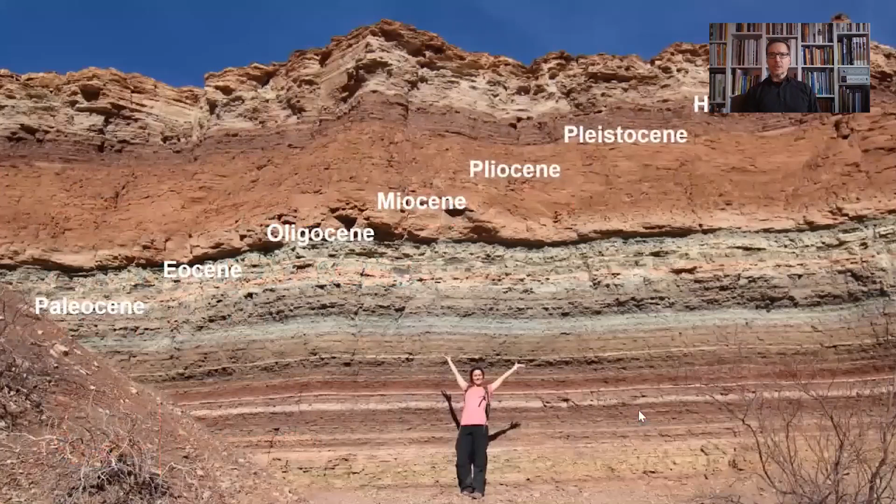But first, what is the Anthropocene? It's a geological era during which human actions have permanently been recorded into the layers of our planet's crust. We see traces of plastics, heavy metals, other sorts of pollution, greenhouse gas levels increasing, and our destructive action is now permanently recorded there. This was brought up by the Secretary General of the United Nations, Antonio Guterres, last December in his first speech about the state of the planet.

And he had rather grim messages, I'm afraid. He said that humanity is waging a war on nature. This is suicidal. He also said that biodiversity is collapsing and ecosystems are disappearing before our eyes. He went on saying that apocalyptic fires and floods, cyclones and hurricanes are increasingly the new normal. He ended by saying, let's be clear, human activities are at the root of our descent towards chaos. That was quite a heavy message from him.

So he concluded that making peace with nature is the defining task of the 21st century. My question this morning is, how can we make peace with nature, and more specifically, what's in it for architecture? So now to the 3 facts and 3 viewpoints.

First of all, I argue that we should reconsider the needs for construction. This is relatively simple by just looking at the global statistics. If we look at the consumption of the 4 mostly produced raw materials—steel, plastics, aluminum, and cement—we can see that their current production ways would lead to close to 920 gigatons of CO2 emissions by 2050. Now this is almost twice the amount of emissions that we could afford to cause if we wanted to keep the planet from warming beyond 1.5 degrees.

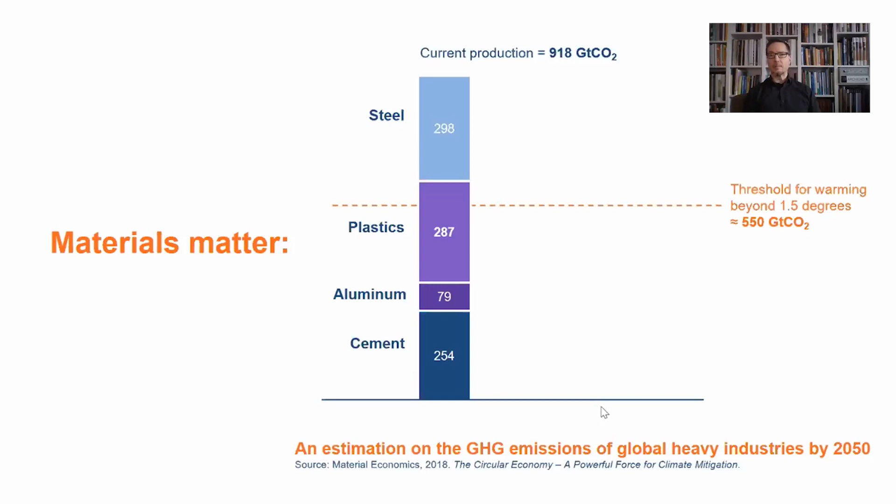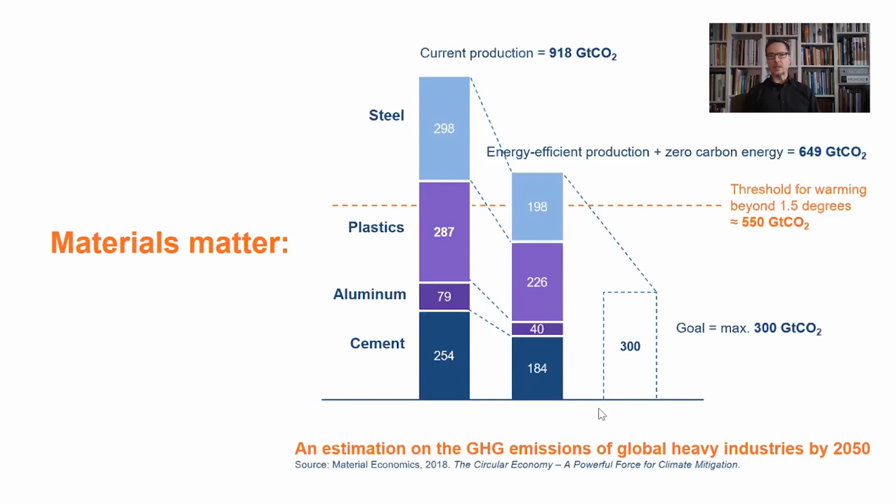So if we change the way we make these materials by introducing energy-efficient factories and zero-carbon energy, we could lower these emissions, but that's still not enough. It appears that only with radical interventions of circular economy could we push these emissions down to around 300 gigatons, which would be the absolute maximum. Now why is this relevant for us this morning? The reason is that these materials are mostly used in construction—not entirely, but the construction sector is the main consumer of all these 4 materials. So therefore this is important for us.

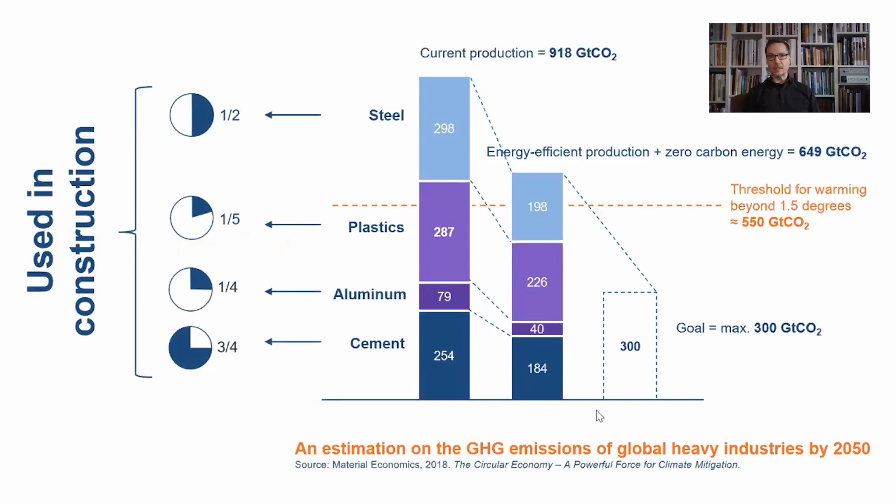So that's why we could ask help from the ancient Chinese general Sun Tzu.

He was not a general expert in the topics we are talking about today. He was not a master of sustainability, he was a master of warfare. And he wrote in his famous book, The Art of Warfare, that the highest level in warfare is not to defeat your enemy in battle, but to defeat your enemy without battle. If we translate this to the language of architecture, could we solve the problems, or satisfy the user's needs, without building anything?

I'm suggesting that we should have a hierarchy for resource efficient construction, in which the first priority would be to do nothing but just utilize existing spaces. Thereafter, renovate them. Then as a third option, refurbish an old building. And as a last option, if none of these work, consider building a new one. This is a straightforward approach and doesn't fit all purposes, but it's something we could consider if we were to drastically reduce our material intensity, especially in the construction sector.

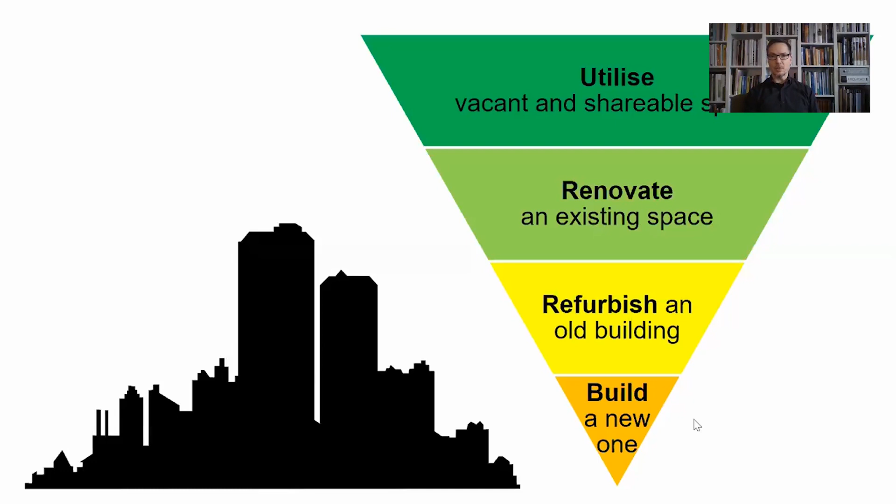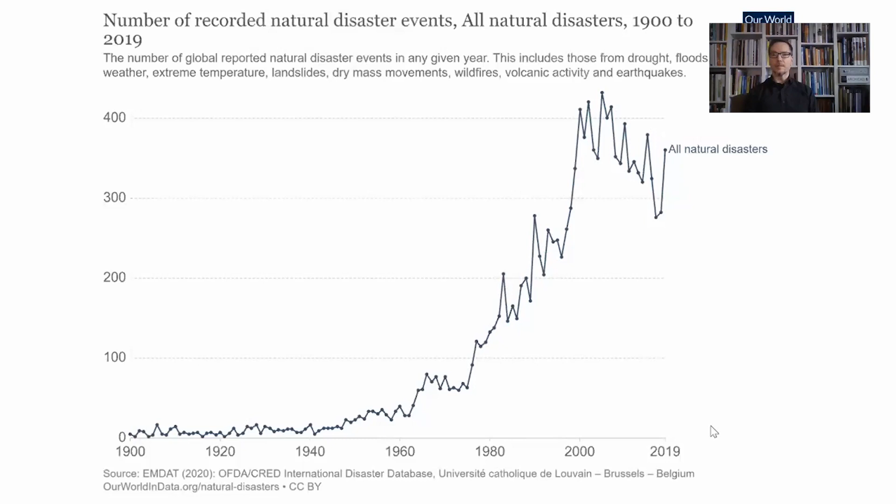My next point is that we should improve the resilience of the built environment. Looking at the facts, it's clear that the number of natural disaster events has gone drastically up, and we can see a clear linkage to anthropogenic climate change. There are more storms, the intensity of storms is increasing, there is increased flooding in certain regions, and this is of course very detrimental to construction.

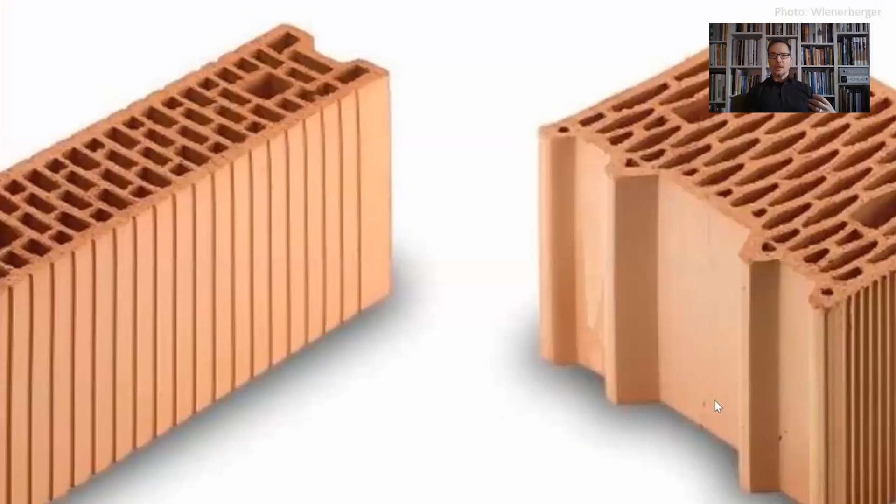So if we were to make our buildings more resilient towards these changes that seem to be going on, should we consider something simpler, something more robust when we talk about materials for construction? Should we consider solid materials? Should we consider massive materials, or even vernacular materials that would be so much easier to extract from nature without heavy processes?

If we fail to address the urgency of climate change, we may go beyond the tipping point of the melting of global glaciers, and that would cause significant sea level rises in the future. At that point, or even before, resilience would not just be against the forces of nature, but also against social and economic unrest, which might be a very significant factor for the maintenance and funding of the buildings we have today or wish to repair tomorrow.

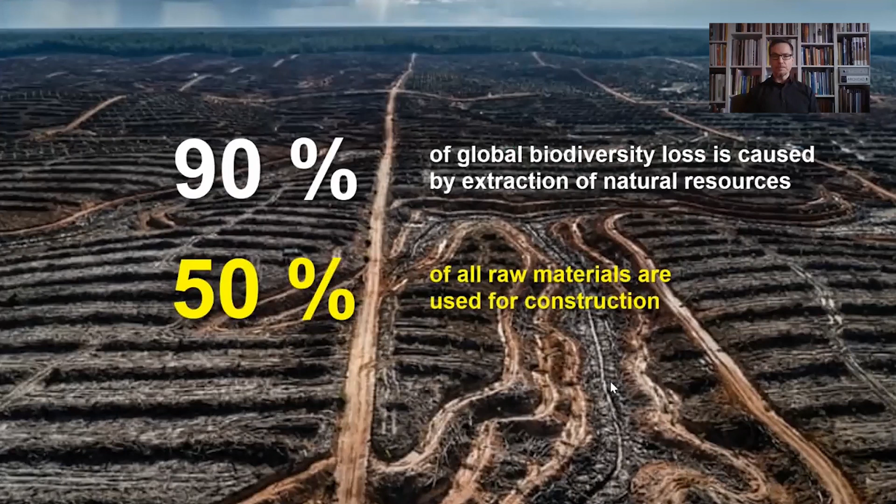My third and final point is that I think we should question our anthropocentric construction culture. At the moment, 90% of global biodiversity loss is caused by extraction of natural resources, and furthermore, 50% of all raw materials are used for construction. And the trends are unfortunately pointing in the wrong direction.

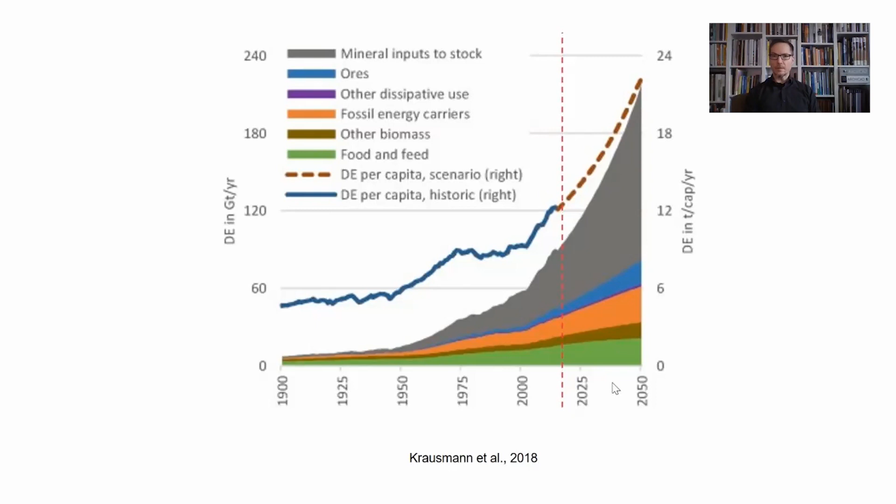But while we are consuming half of the global raw materials every year for construction, we are doing that at the cost of our neighbors on this planet. While we extract materials, we take that from the habitats of animals and plants and other species of life with whom we share the only habitable planet we know of. Should we reconsider this? Instead of just being an extractive and destructive force on this planet, could we consider ourselves as one of the many forms of life with whom we share this dear planet Earth?

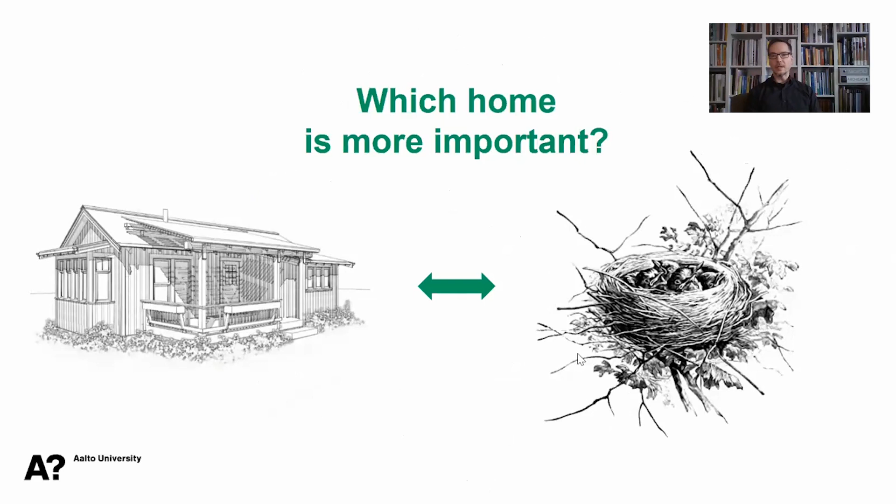If we could consider ourselves in this position, then we could perhaps ask a difficult but much needed question: which home is more important? Is it more important that I can build myself a summer cottage in a nice place? Or is it even more important that some endangered species, or species that might become endangered, could maintain their habitat on that spot? What is my right to build?

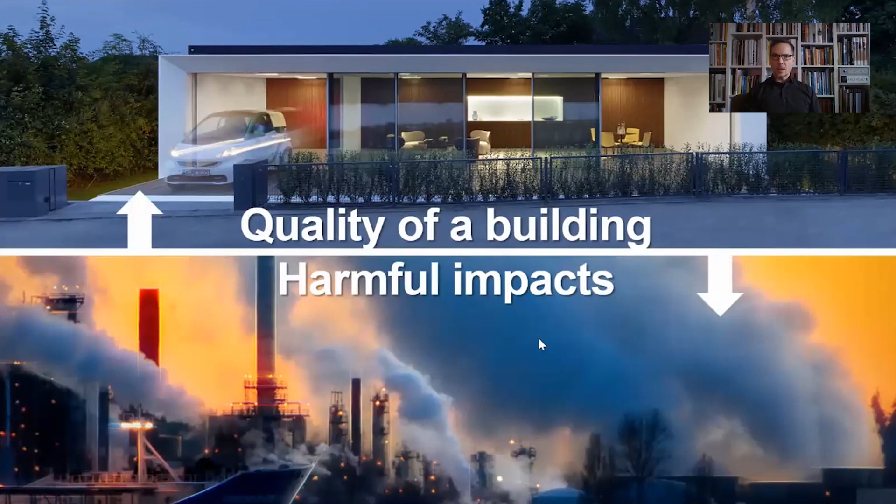I'd like to conclude by saying that architecture for the Anthropocene, from my perspective, means we should increase the quality of a building and decrease its harmful impacts. How would you decide if you would like to make peace with nature?

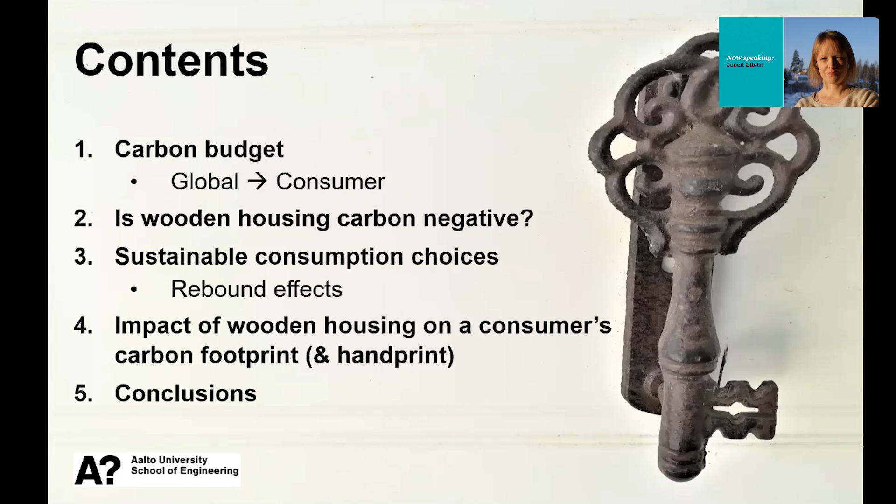And then I will shortly show some of our preliminary results from our paper that looks at the impacts of wooden housing on consumers' carbon footprint and handprint. And by handprint, I mean these negative emissions from carbon storage. And then I have the conclusions.

And in Finland, the balance is a little bit worse than I expected or believed before. So we have around 56 megatons of territorial emissions, and then this consumption-based carbon footprint is around 60 megatons. And our net sink from land, mainly forests, is around minus 20 megatons annually. So we are actually quite far from the carbon neutral targets at the moment. And of course, when we talk about wood construction, we should ensure that we are not decreasing these forest sinks, but have sustainable forestry where we plant equally as much forest as we cut down, from the sinks perspective.

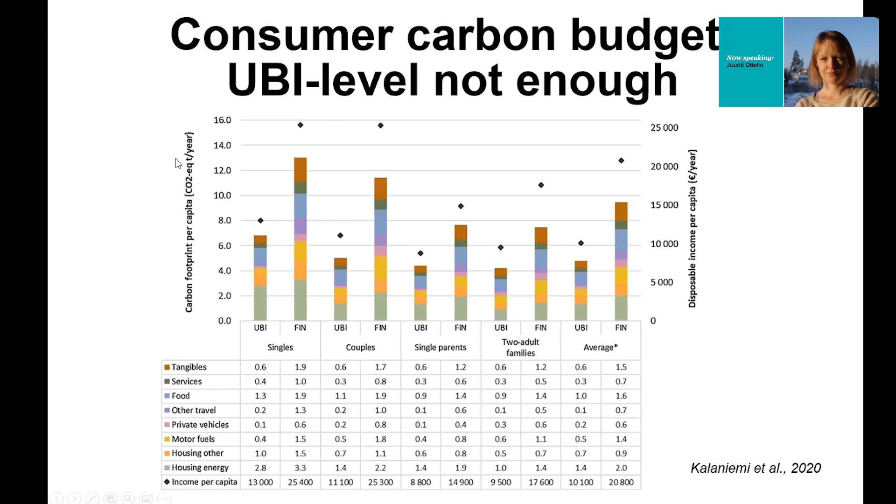And of course this is a very worrisome message, considering not only these climate goals, but also the sustainable development goals related to the reduction of poverty. So if you would anyway like to have a carbon footprint that is at the sustainable level, you can see that it's difficult by only reducing your consumption. So you need other solutions as well.

And there are, of course, technological solutions like renewable energy. But you can also try to increase this kind of negative emissions, which we call here the carbon handprint of a consumer. So by these negative emissions, I mean carbon sequestration and storage, and the activities and consumption that is related to that.

So for example, planting of trees, or restoring natural areas, or carbon smart gardening, which is the main topic of our ongoing co-carbon project. And also in this presentation, I talk about this wooden housing. But then the question is: is wooden housing actually carbon negative?

Wooden housing has lower life cycle emissions than other types of construction, for example concrete and steel, but this only means that it has a lower carbon footprint. So in the balance, it means that you have a lower carbon footprint from this shelter category.

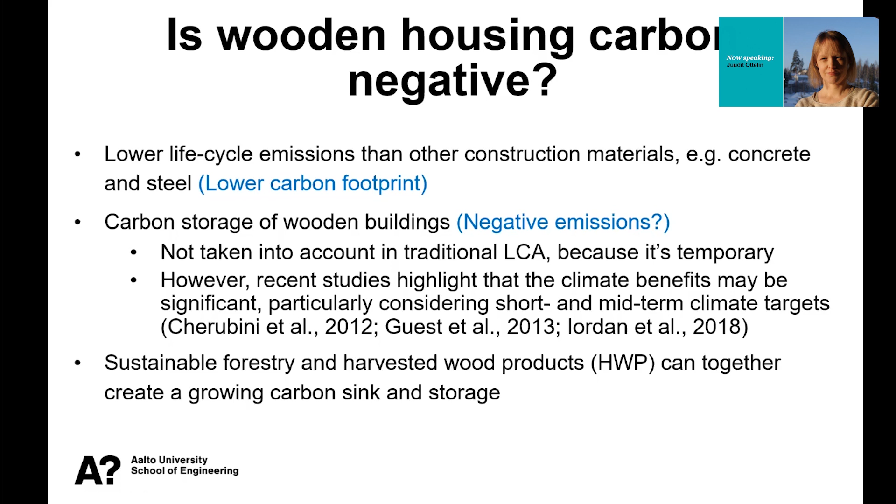So maybe we can put wooden housing on the handprint side, but that's still uncertain according to the current literature. The carbon storage varies from around 100 kilos to 300 kilos per square meter. This is a review by our PhD student Ali Amiri.

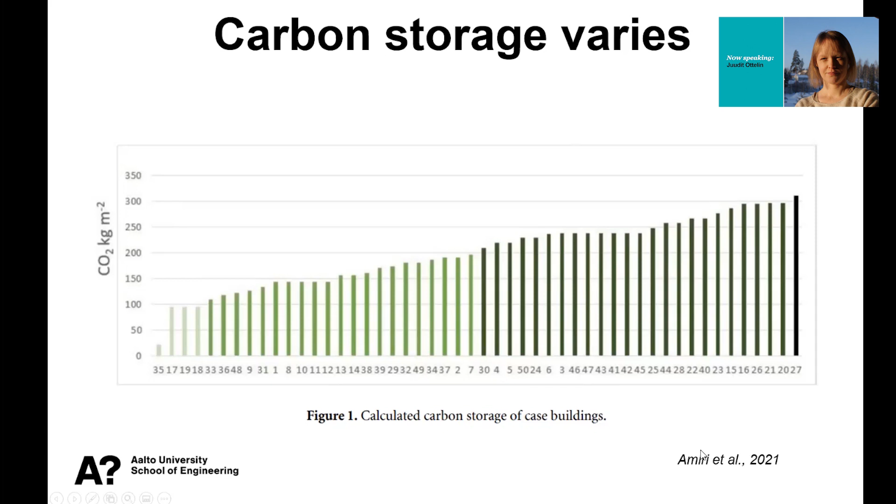So if somebody says that the carbon storage can even be bigger than the carbon footprint of the construction, they are using process LCA, which usually takes into account only the main processes related to production, but then there is this truncation error of leaving out the upstream emissions.

When we talk about carbon footprints, we usually use input-output analysis, which is a more comprehensive method that doesn't leave upstream emissions away, but takes them into account until infinity. It's a mathematical model. So when you use input-output modeling, the carbon footprint of construction is always larger than the carbon storage. So in that sense, wooden housing is not carbon negative.

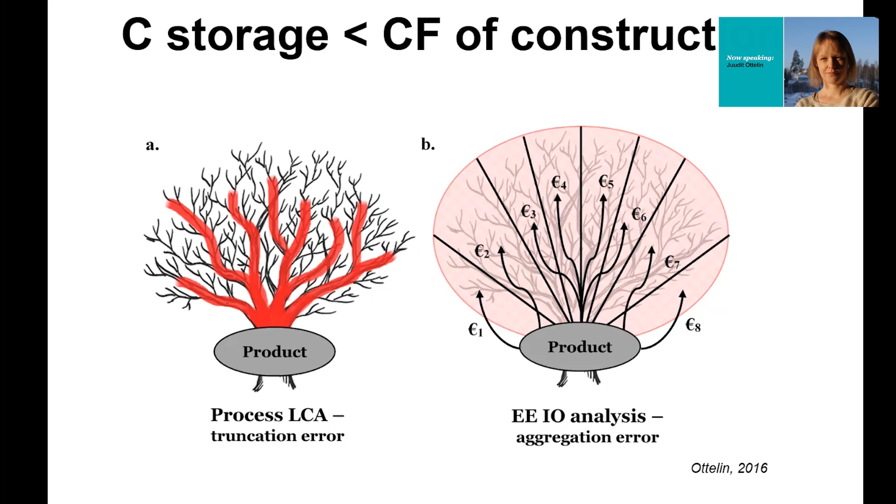Okay, so let's go to the sustainable consumption choices.

Basically, we have two types of sustainable choices that we can make. The first type is that we are actually saving money when we make these choices. For example, if you give up car ownership and start cycling and using public transport, you save around 1,000 euros per year, and then you usually consume that on something else, which increases the carbon footprint of the rest of your consumption. This is called a rebound effect of consumption.

But then there is also this nicer side of rebound effects, which is that if you actually spend money making sustainable choices, for example a sustainable investment in solar panels, electric vehicles, or a wooden house, then you have to take that money from your other consumption. You have to save in order to purchase solar panels. So it reduces your other consumption, and thus reduces the carbon footprint of the rest of your consumption.

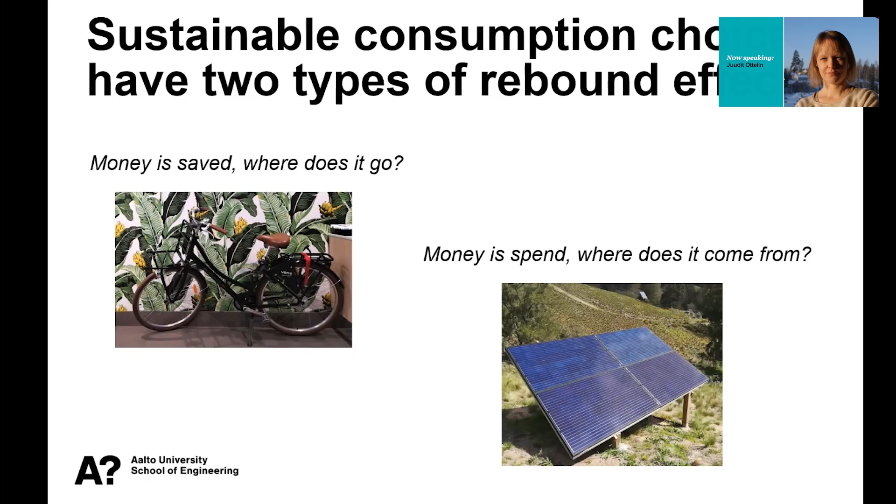I will show one example, and this also relates to what Matti was talking about, the kind of retrofitting or not constructing new. I have a viewpoint on this that is often not considered, which is the rebound effect of the investment.

In this picture, I compare old house residents to new house residents. In this paper of ours, we were interested in the energy efficiency of new buildings, and we indeed found that the carbon footprint of housing energy is around 400 kilos lower in new houses compared to old house residents. But if we look at the total carbon footprints, we can see that there is actually around a 1 ton reduction or difference. So the carbon footprint of old house residents is around 11 tons, and in new houses it's less than 10 tons. So in addition to the 400 kilos, we have 600 kilos reduction from other consumption categories.

If you look at where it comes from, it's from tangibles like electronics and clothes and all kinds of stuff, and then food consumption, other travel which includes holiday travel and public transport, and driving and private vehicles. There is no clear explanation for why you reduce your other consumption, except that if you look at the expenditure of these two consumer groups, we can see that new house residents have higher housing loan payments, and thus they have less money for the rest of consumption. So this is a negative rebound effect of the green investment, in this case the new house.

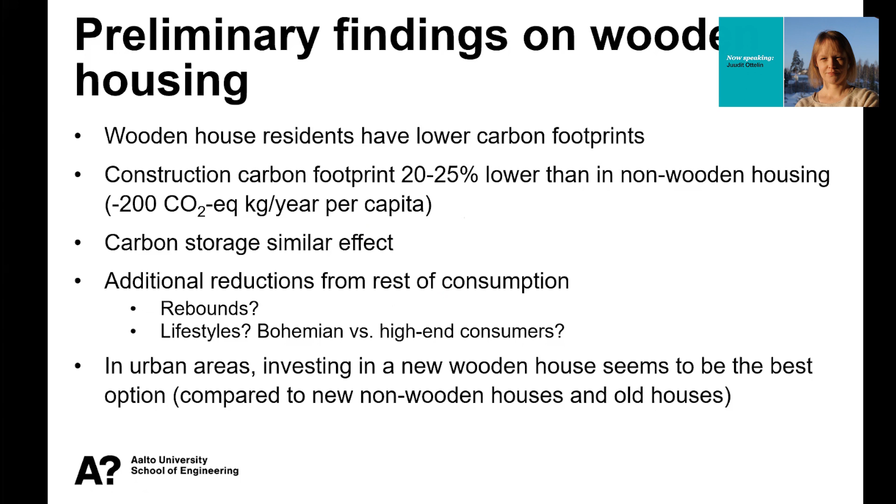So this is kind of a counter argument towards retrofitting instead of building new, but then you have to remember that this is in the current economic model.

So of course, Matti was talking about shifting to a circular economy. And if we do that and we have legislation, for example, to increase the price of carbon, then the situation changes dramatically. But in this moment, in this current situation, if we start retrofitting without changing any legislation, we end up with significant rebound effects, which must be taken into account.

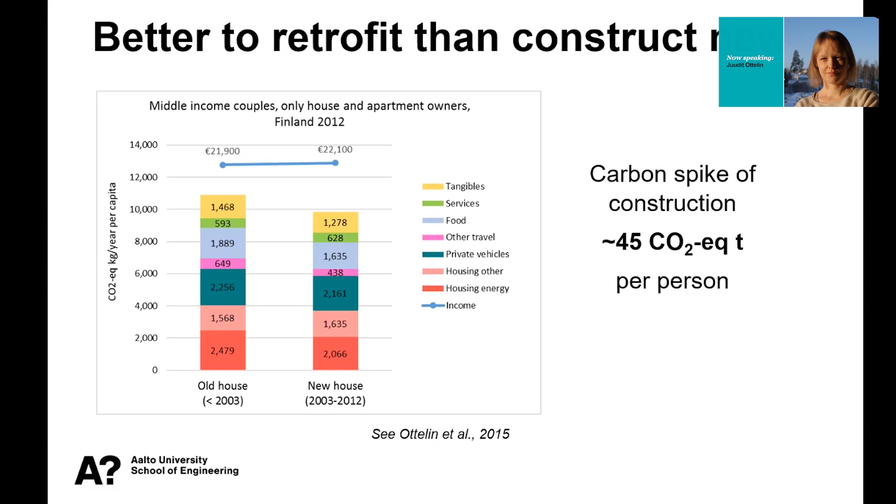So as a conclusion, I would say that wooden housing indeed is a sustainable consumption choice because of three reasons. It has lower life cycle emissions from the construction, then there is this significant temporary carbon storage, and then the negative rebound effect of the investment, which reduces other consumption and the related carbon footprint.

In addition, I wanted to highlight that the carbon negative balance is quite difficult to ensure, whether we are talking about consumers or nations or cities or anyone, because the existing sinks are already taken into account in our climate targets. So how do we make sure that we are actually increasing the sinks and not just shifting the ownership of the existing sinks?

And then there is also this concern that the focus on sinks and negative emissions at the moment may be a distraction from the emission reduction. So what I'm worried about is that when we talk about carbon neutrality or carbon negativity, citizens get the view that we are already in a good place concerning our climate targets, when in reality we are still here. The emissions are still increasing, and we have not managed to make them turn down.

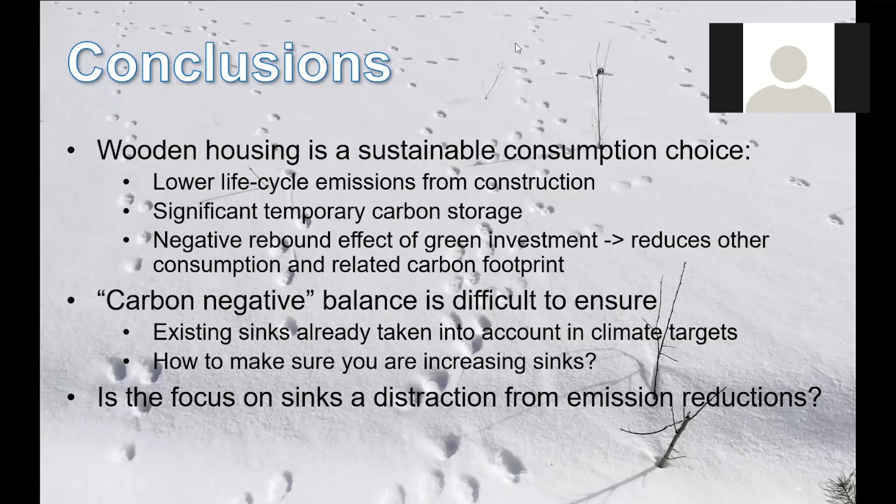Mitigating urban sprawl is a priority, but there are limits to densification as well. While trying to limit urban sprawl and make our cities more dense, we are promoting material efficiency, and hopefully also material dependency and intensity of buildings and infrastructure. But at the same time, we are decreasing the area and capacity of urban ecosystem services, which are important not only for climate or carbon sequestration in urban areas, but have so many co-benefits that we shouldn't densify our cities beyond certain levels.

And what's that certain level? That appears to be very context specific. For example, in Helsinki there's a lot of potential in existing buildings, so there isn't an urgent need to build more at the moment.

Then there was a question straight to Juudit. There's quite a vivid discussion in the chat, thanks for that. Hanniina Manner, could you ask the question publicly? I guess this goes to Juudit, or anybody.

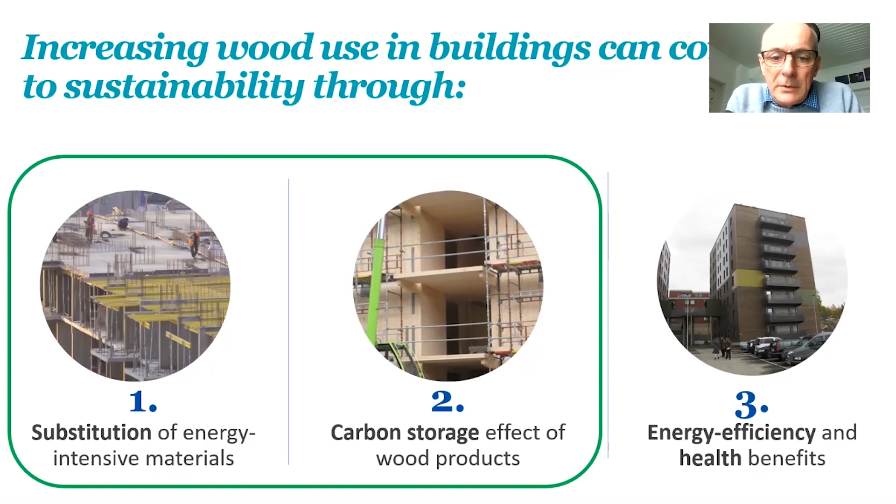And this is also being researched. But today I'm going to concentrate on the substitution and the carbon storage effects and how we might in the future be able to promote these further.

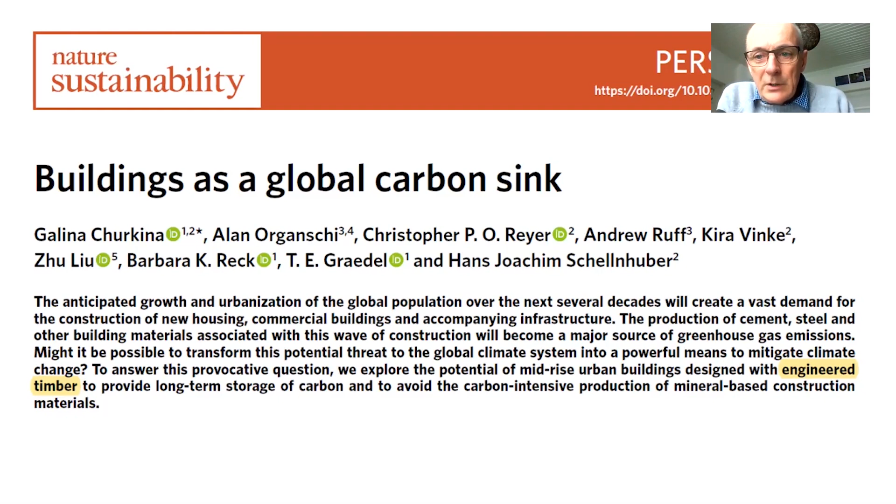Of course, there's this huge potential here, and for sure we could do an awful lot more to promote wood construction. So I think it's probably true to say that we do still need mechanisms, incentives to increase the amount of wood construction, particularly in Finland, for example, in mid-rise buildings where it still hasn't penetrated to as great a level as we might expect it to.

Of course, in the residential housing markets, single family houses and row houses, it's been dominant there for many, many decades, even centuries. So there's maybe some room to increase the building there, but probably not as much as it is in urban areas and in mid-rise buildings, high-rise buildings, and also in other commercial buildings.

But I think it was Sari in the audience who raised this issue about what happens in the forest. I think this is a critical thing, that we need to be absolutely sure that what we're doing is actually leading to an overall benefit, and we're not creating bigger problems than we are actually trying to solve.

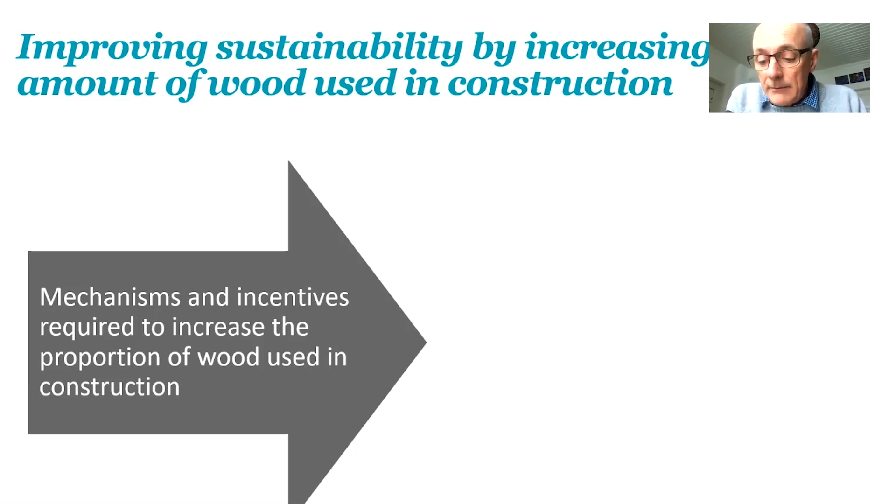And there's been papers that have been published quite recently questioning our rush into wood construction and the expansion of the bioeconomy because of the impact it will then have on the ability of forests to supply the material and also to retain the other ecosystem services such as the carbon sequestration and the maintenance of biodiversity. And what we're hearing more and more about now in the press and in the media is this other critical issue about biodiversity.

So we end up in a situation perhaps where we need to think about how do we square the circle? How do we try to increase this amount of wood going into construction, building more wooden buildings so that we can get the benefits from the substitution and the carbon storage, but then without moving to non-sustainable practices when it comes to harvesting.

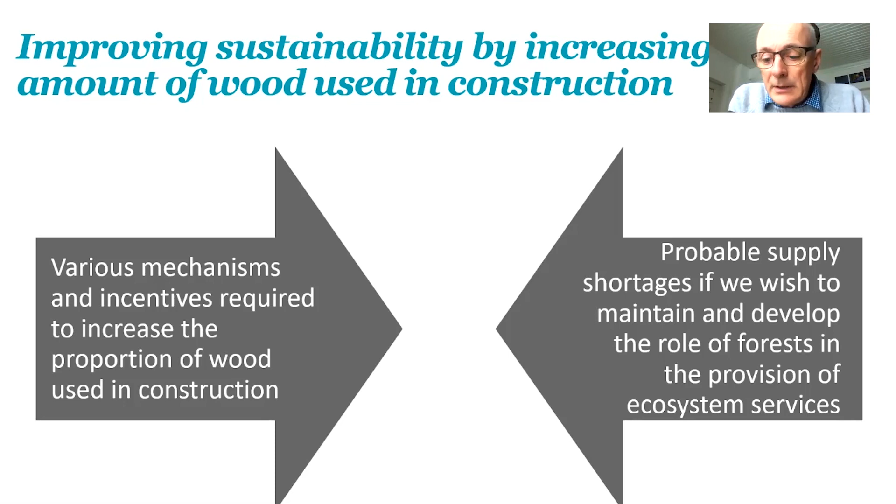We have to bear in mind that because of climate change, forests are changing. We are seeing more forest fires, so there are a lot of dynamics within the forest that we need to understand in a holistic way. I think it's very important that we look at these in a systemic manner.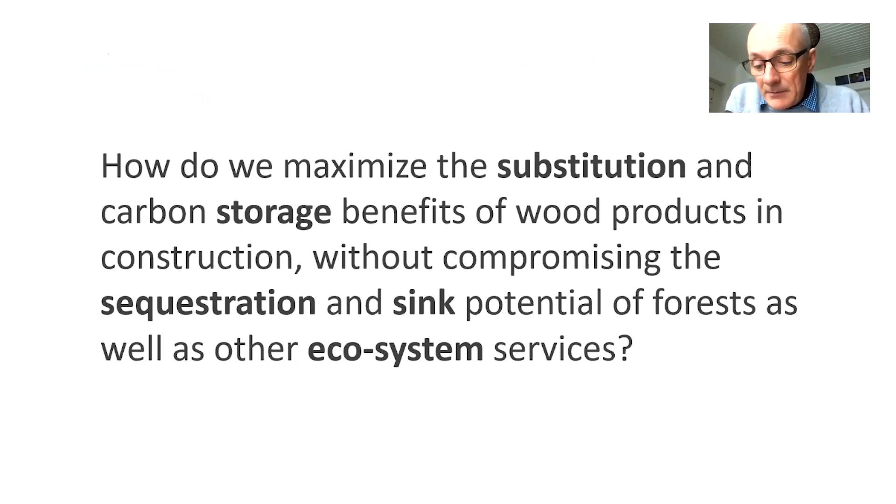So then the question is, how do we maximize the substitution and storage benefits of wood products without compromising the sequestration and sink potential of forests, as well as other ecosystem services? This brings me to the main topic I'd like to cover today, which is materials efficiency and resource cascading. I think this is something we really need to focus on in the future.

I've taken a fairly simplistic approach to this materials efficiency. How can we be more efficient in our materials use? Well, of course, when manufacturing products, in addition to reducing the energy inputs in the manufacture of our wood-based materials, we need to utilize the resources as effectively as possible.

I think this is embodied in the concept of biorefineries, where we use all the fractions of the biomass. We must recall that when we produce sawn timber, we only produce about 50% of sawn timber from a log, and the log is only a proportion of the biomass that's actually removed from the forest. So we need to accept that we need to utilize these other fractions of the biomass as effectively as possible.

And for this, we need very integrated industries that are able to use these in a very effective way. Another way we can look at it, and this is maybe the most obvious one in the construction sector, is how do we extend the use time of a building? How do we utilize buildings very effectively, as Matti was talking about, but also extend the lifetime of the building, making it more adaptable, more flexible, so we can actually extend the use time.

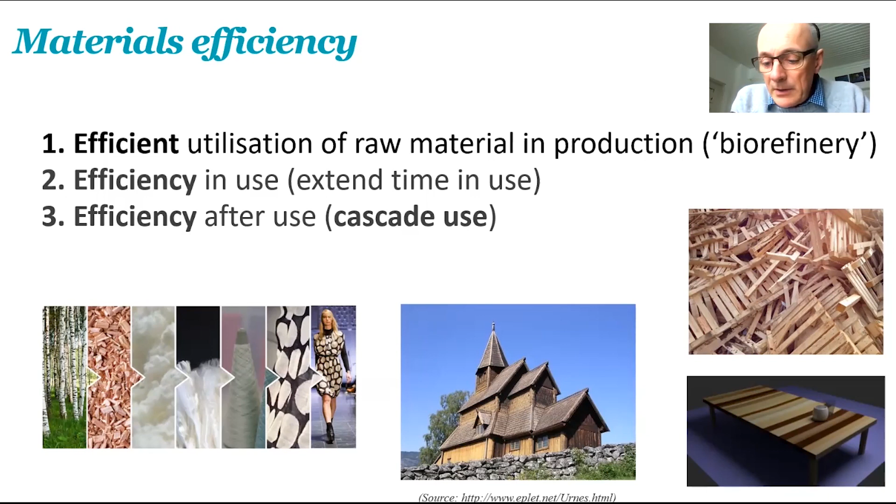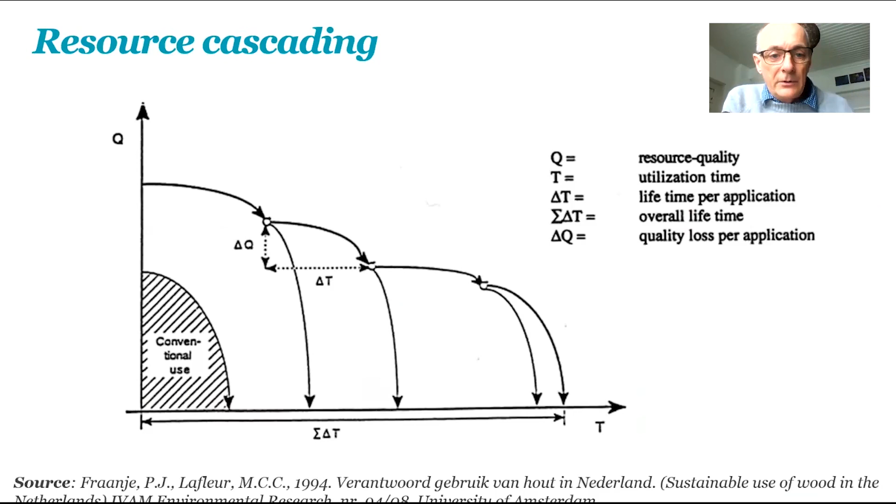We could utilize that material in different ways to how we're doing it now. We could cascade it, meaning we could use it for multiple purposes before we eventually dispose of the material. I think this concept of resource cascading is quite nicely embodied in this diagram, which shows us what we typically do currently is have a single use for a material.

Let's say it's a beam functioning in a building. When the building comes to the end of its life, or is renovated and the beam is removed, it's typically chipped up and incinerated with energy recovery. An alternative scenario would be that the beam is reused in another building or in another form. It may not be quite such a demanding application, but it would still be reused before being converted into particles for some other kind of product.

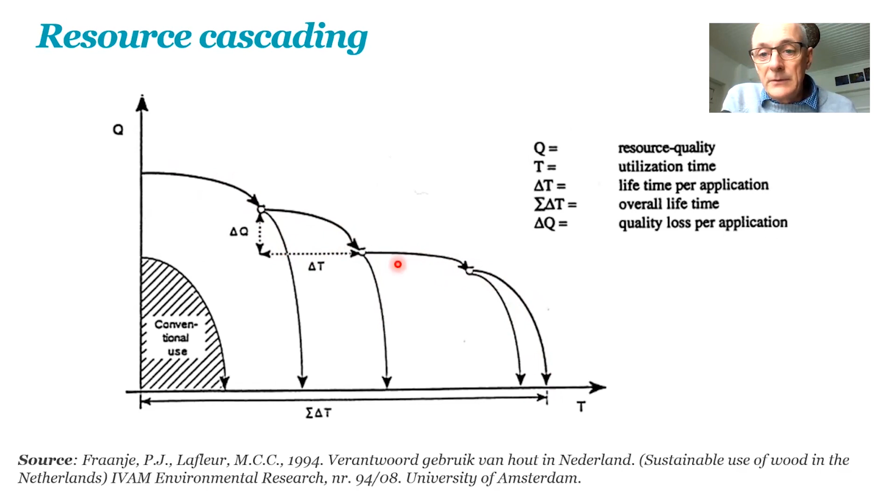You had mentioned about biochar production. It could be particle board production, before eventually recovering the energy content. So this is the idea that we extend the use time of the material for a much longer period through different applications over a greater period of time.

If we think about how much wood is actually going into buildings, it's a relatively considerable amount. Global production of sawnwood and wood-based panels is something like around 900 million cubic meters per year. Of course, not all of that goes directly into buildings, but a significant portion will find its way into buildings. So there's a very significant quantity, and a lot of work is now going on to look at this.

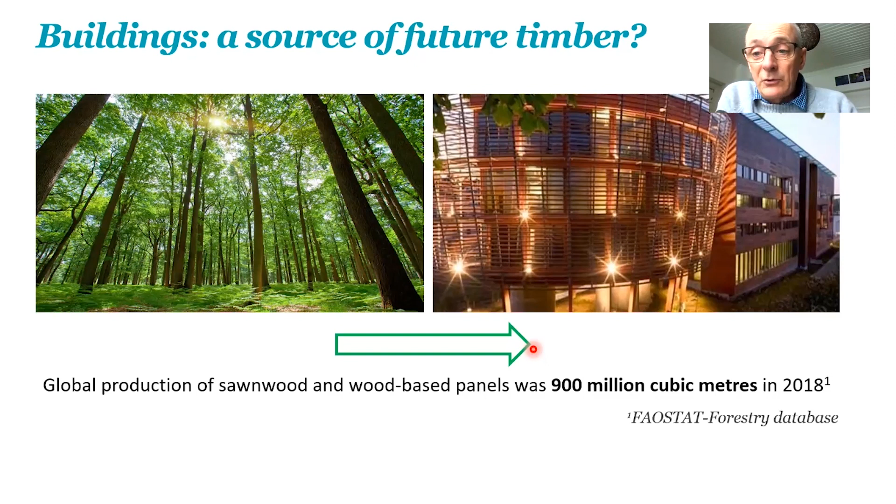Not only how much wood could go into buildings in the future, but also how much wood is actually in buildings currently. We've been involved in several studies to look at this. In Austria, for example, our colleagues in a project estimated there was around 32 million cubic meters of wood in residential buildings in Austria, and this would increase over time to around 50 million cubic meters.

We've just completed a study where we've estimated that just in the structural parts of residential buildings, there's around 17 million tons of wood actually embedded there. So there's an awful lot of material potentially available. We don't know so much about the types of products and the mix of products there.

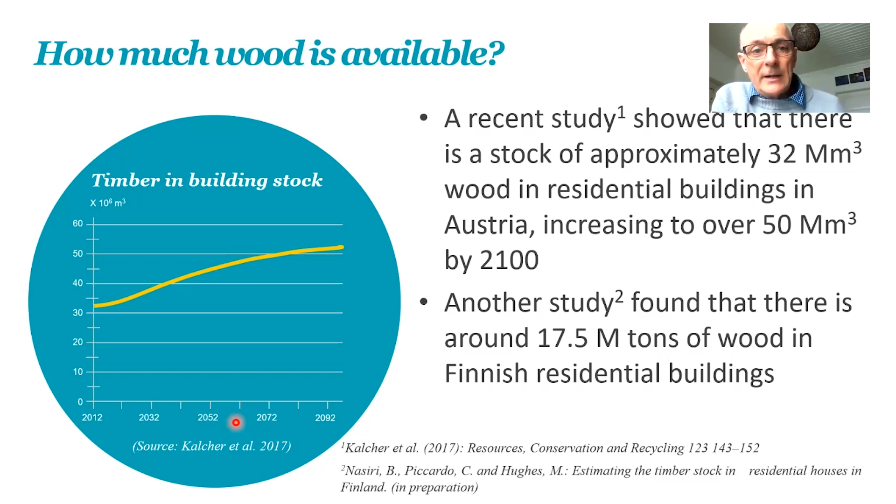We don't know so much about the quality of the material, but we know roughly how much is there. We know how much material is being utilized.

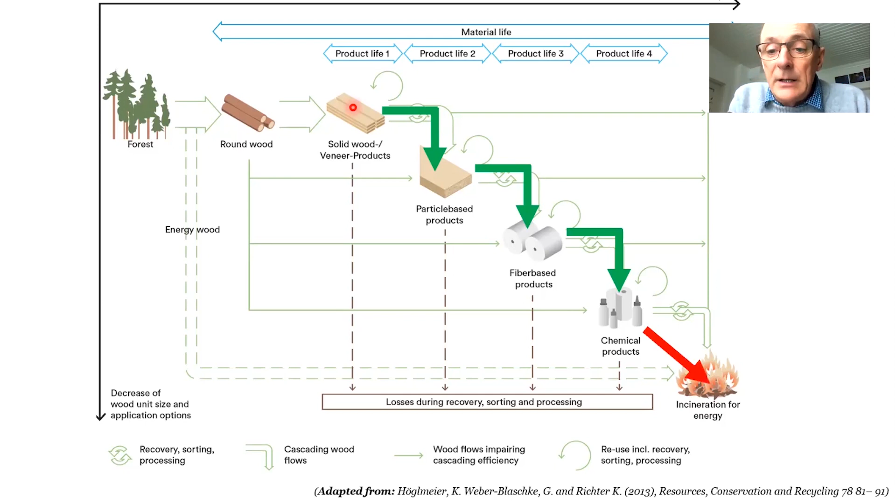Going back to this idea of cascading, what we'd really like to have is something that looks a little bit like this, conceptually at least. We'd have our solid wood products, which we'd maybe reuse, possibly even more than once, before converting that into particles or smaller units that might be used in particle board, for example. It would depend very much on the local industry structure, what options would be available. Particle board is not a very big product here in Finland, but it is in many parts of Europe where there's a high population density and a need for this kind of product. But it might be something else like biochar, and then maybe some fiber-based products, chemical products as precursors, perhaps for textiles, before finally the waste is incinerated for energy.

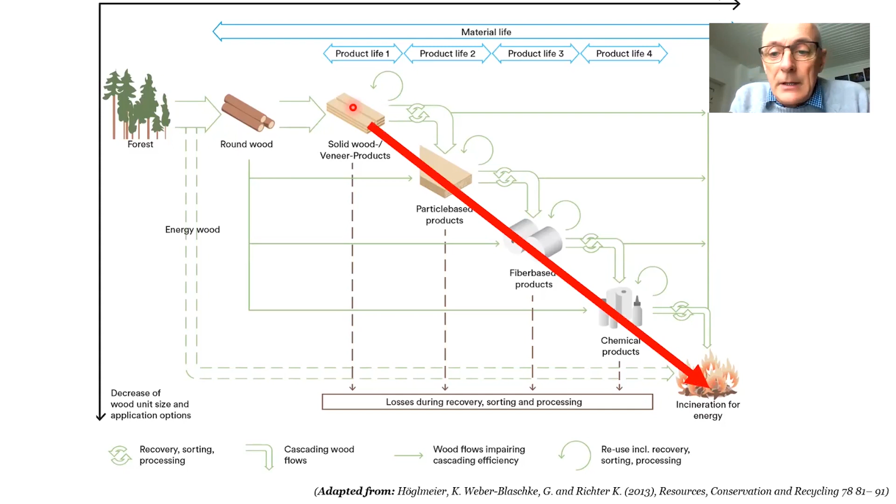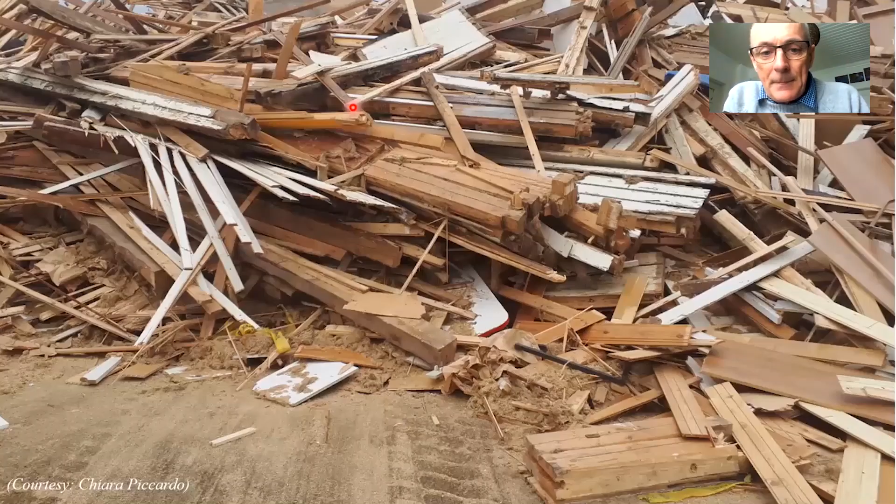Today what we do is this: basically it goes directly from the building to incineration, and there are many reasons for this. But in essence, it makes sense to do otherwise because we could be more resource efficient, and the studies that we've been involved in, and our colleagues have been involved in, have illustrated that there are advantages, not just in terms of materials efficiency, but also in terms of carbon impacts, to be gained by introducing cascading.

But if we go to a waste processing plant, whether it's here in Finland or in any other country in Europe, the mix of wood products might be slightly different, but this is typically what we see: a mishmash of different broken pieces of wood with all sorts of contaminants incorporated there, which makes the reuse extremely difficult. The kinds of things that we tend to see are things like nails, screws, and other metallic fixings, which are incredibly difficult to remove in practice.

So this is a big limitation. We also have other materials like foams, some polyurethane foam here and some styrofoam here. There are other materials, there may be coatings, which we don't know whether they will be toxic or not. There may be preservatives in there. So there's a lot of technical challenges to reusing the material.

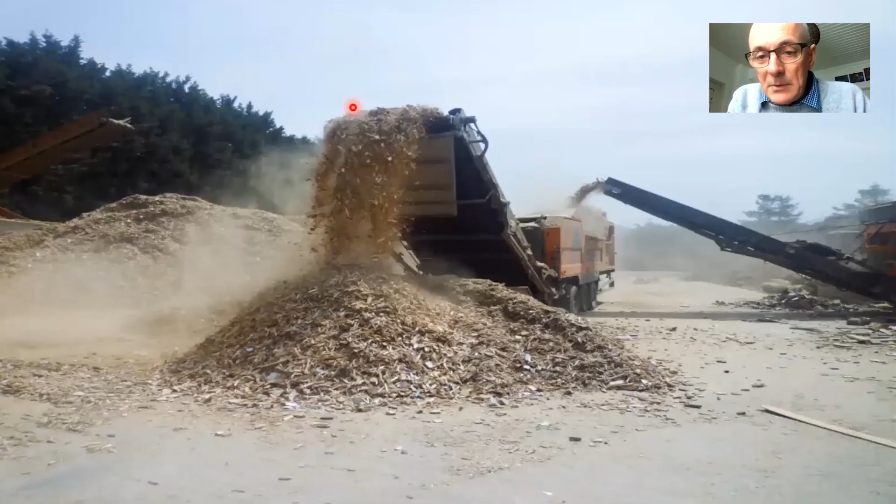So typically this is what happens. This is a photograph from one of our colleagues in Spain in a current project, and this is what we would see also here in Finland. In a waste processing plant, the material is chipped into smaller pieces, and then that is used for energy generation.

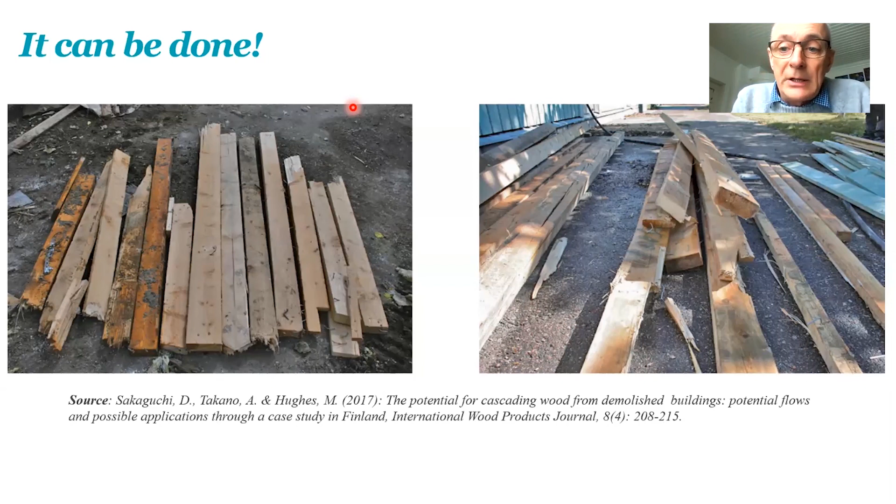It is possible to do something. This is from a study we did some years ago, where we actually went into a demolition project in Porvoo and extracted some larger pieces of timber. We were interested in understanding what the quality of this material was. But it was clear that we can actually do it, and we can extract material from the building that could potentially be reused after some remodeling.

So the key issue seems to be that we build our buildings in a way that makes them difficult to dismantle in the first place. This is something we're looking at through one of our ongoing projects, the InFutUReWood project. We're looking at how we might be able to build in the future so we can recover wood more easily and more quickly, so we avoid the imperative to demolish as quickly as possible. If we can recover wood with higher quality, that opens up more cascading options, perhaps direct reuse, perhaps reuse into other products that have higher utility. And if we were to do this, it would allow us far more potential to cascade, which would have an impact both on resource efficiency and would lessen the pressure on our forests, which may be very important in the future.

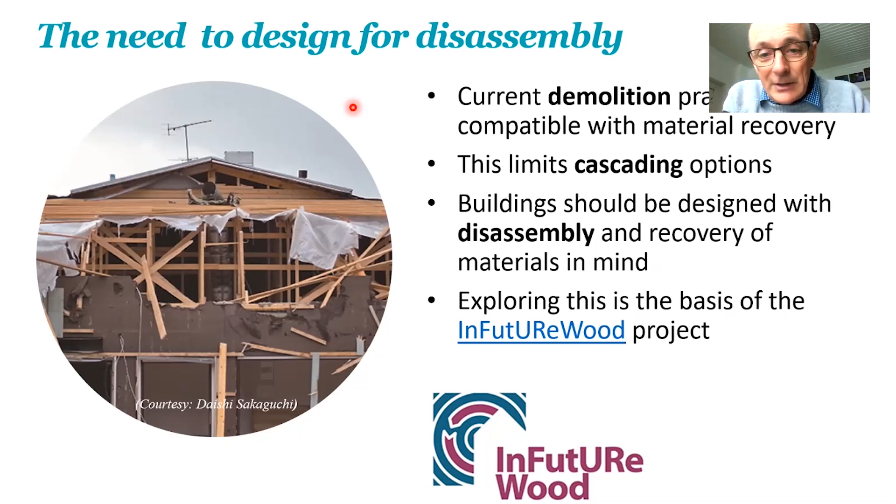So, design for disassembly. This is why I'm now very interested in working with people like Pekka and other architects, designers, and structural engineers, to understand how we might be able to do this in practice.

We have very good solutions for this. Not everybody wants to live in a log house, or it's maybe not the most practical building solution, but the concept of being able to have something that we can actually dismantle and then reuse at a later stage, I think is quite neat.

I often imagine why there might be so much incentive to recover and reuse logs from old buildings. I live in an old log house, and many of the logs here are clearly from previous incarnations. I imagine that if you have to go to the forest, cut down a tree, and form these logs by hand, you have quite a lot of investment in that material.

We're very lucky to be able to go down to the nearest hardware store and buy whatever we want at a very low price. So how we value materials, I think, is something we need to shift our thinking about.

So maybe just some final thoughts. I think I'm running out of time now. We know—

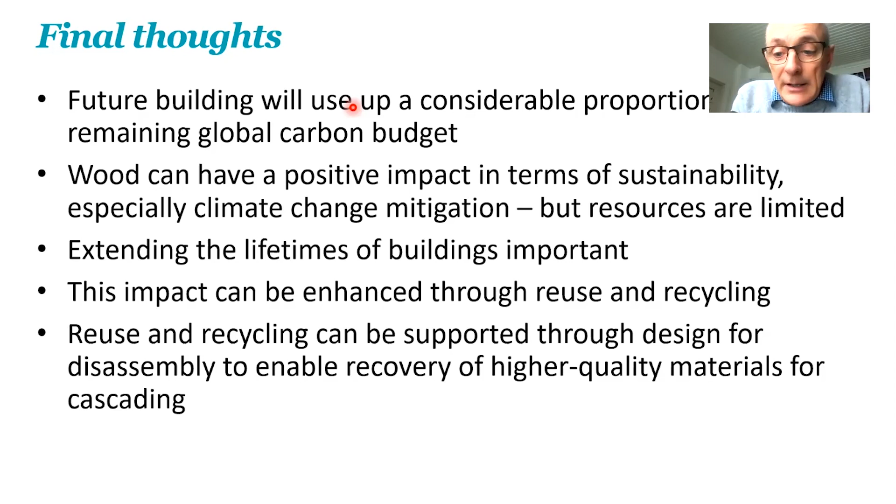This in itself can be promoted through design for disassembly. So we need to be thinking about not just building buildings, but also building buildings that we can disassemble and use those materials again in the future. So thank you very much. I think my time is probably up by now. So yeah, any questions, I'll be very happy to try to answer them.

Thank you, Mark. You asked yourself the question, so what is the problem? I was thinking that in Finland, the forests have been very important through our lives, starting from when the first people came to Finland. And now it seems they are important from a very different viewpoint—as a carbon sink. This is maybe a question for all the presenters or the audience as well: is there really at the moment any better choice than wood if we think about carbon effectivity and environmental impact issues? A simple yes or no would do in this case.

How about you, Mark? One thing I think we should be acutely aware of is timescale. There might ultimately be better solutions, but we need to do something and we need to do it now. There's no point thinking about this in 10 or 20 years' time—it's going to be too late.